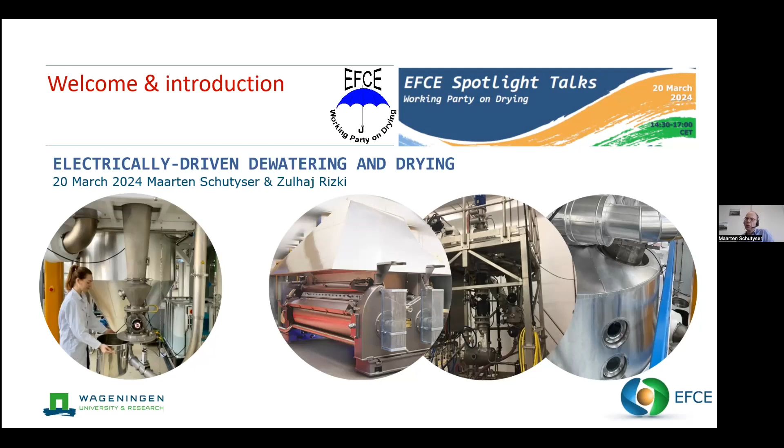Welcome once again. Maybe a little bit of background on why we are organizing this talk, this small symposium around this theme: most of the current process technologies are still based on heating, using heat. So most dewatering and drying processes are thermally driven. We really need a radical change, a reduction in the use of energy, also because drying is one of the most energy intensive unit operations, for example in the food industry, and also many other industries. It is one of the more intense energy consuming process operations.

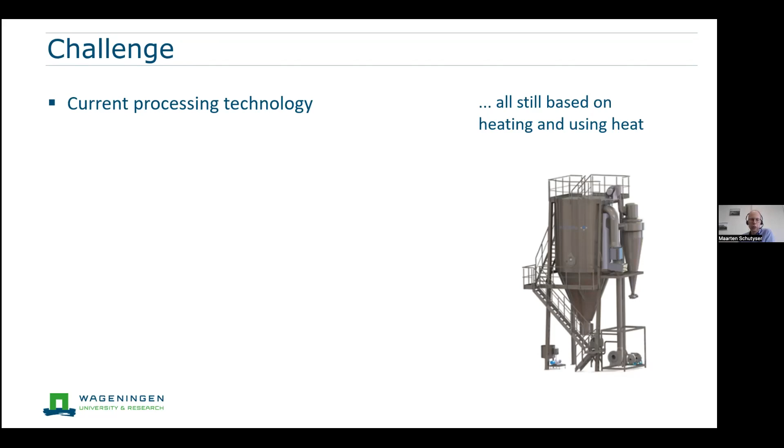We really need to use much less energy in dewatering and drying processes, but also switch to more renewable energy sources for processing. Of course, we cannot cover entire countries with solar panels to supply the energy for all these dryers, because they consume a lot of energy. So it's really important to reduce the amount of energy needed to drive these processes.

Of course, we could also say, let's just stop with drying, but that's not possible. Drying is really important to preserve foods, to make functional products. It's therefore critical not only to remove water, but also to structure your product in a certain way to give it certain characteristics. So it's quite complex, not an easy task, because otherwise people would have already done it.

But it's really important that researchers and industry keep seeking novel solutions to not only use less energy with drying, but also look at electricity-driven processes that can make use of electricity as a new renewable energy source, for example based on solar or wind energy.

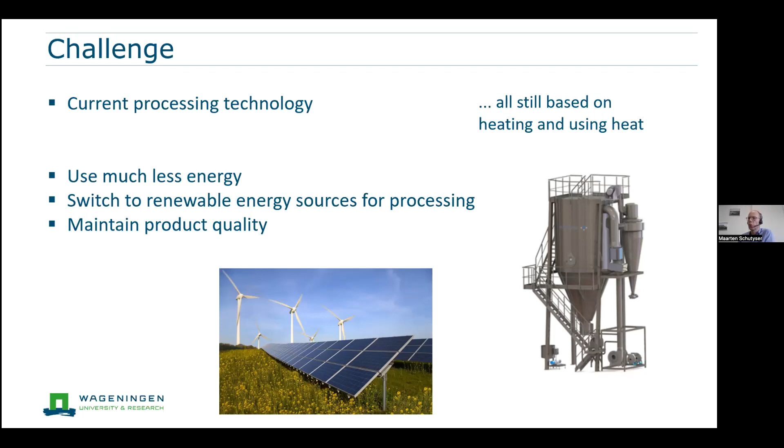So moving from fossil fuel-based water evaporation to electricity-powered liquid removal, that's the thought. Not per se to heat the air of a spray dryer with electricity rather than a gas burner, but one of the ideas is also to really use electricity as a means to push out the water from a product.

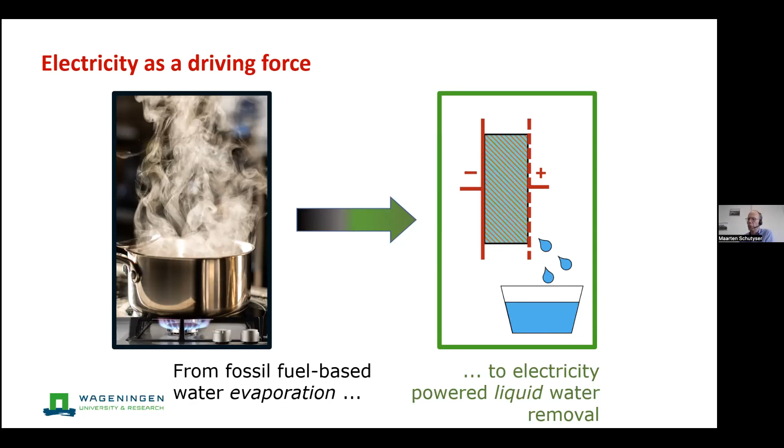And that's why we invited several speakers on different topics. Here you see an example of different dewatering and drying technologies. First, let's look at the dewatering technologies. You could distinguish dewatering technology without phase transition, like mechanical dewatering, or reverse forward osmosis, but also the example of electro-osmosis, which will be touched upon by a speaker from the Technical University of Eindhoven.

It's also possible to do dewatering with phase transition, like freeze concentration or evaporation, although these are more energy intensive. So how nice could it be if you can use electricity as a way to pull out water from sludges? In principle, electricity as a driving force is much more powerful than a temperature gradient or pressure gradient. So there's a high potential.

However, implementation of these technologies and scaling them up is another challenge, which will be touched upon by one of the speakers. Now, ultimately during drying, you want to also shape and microstructure the product, which is actually the distinction between dewatering and drying. In dewatering, you just concentrate; in drying, you actually go to a final microstructured product.

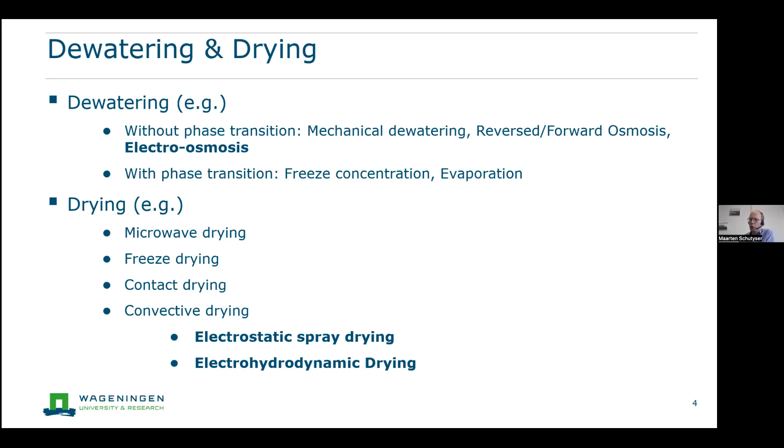So then we come to today's program. We start with the introduction from Zulhaj Rizki and myself. Then we'll start with two presentations.

The first one on electro-osmotic dewatering and the second one on electrohydrodynamic drying, from Sarthak Mehta and Judith from Technical University of Eindhoven and Wageningen University. Both are PhD students, and they work in a bigger project called Electrified, in which we study three different technologies using electricity as a driving force for dewatering. That was one of the basic ideas, to further extend that with extra speakers.

And we're very happy that Professor Alex Martynenko will give a presentation on electrohydrodynamic drying and the prospects for its practical applications, all the way from Canada. But of course, online is easier than live. I'm very happy he's willing to present his experience on these technologies. And also a presentation from Chutani on electrostatic spray drying of whey protein isolate and lactose dispersions. She is from the Irish Institute, the Teagasc Food Research Center. We're happy she is willing to give a presentation on this interesting novel spray drying technique, also enhanced by the use of electricity.

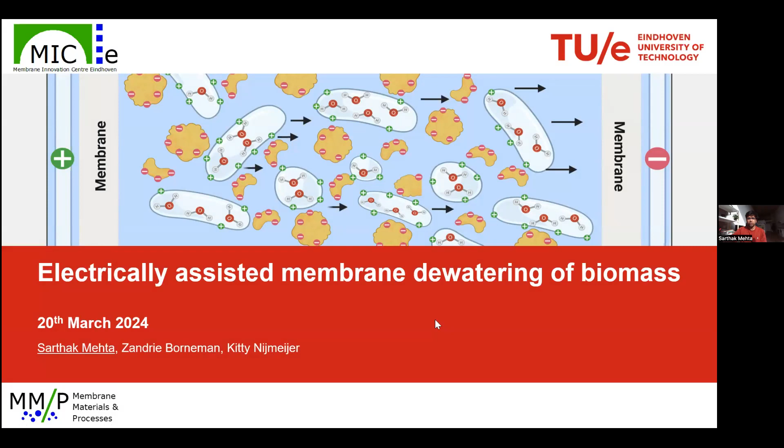I hope my screen is visible to everyone. Thanks a lot for being here. My name is Sarthak Mehta. I'm a PhD student at the Eindhoven University of Technology, and today I'll be talking about my project, which is electrically assisted membrane dewatering of biomass.

We know that the bio-based market is growing like never before. Earlier, food products were considered part of the bio-based economy, but now new products and commodities are emerging in the form of packaging, biofuel, and similar examples. The whole reason we are moving towards a bio-based economy and bio-based products is because we want to get rid of fossil fuel, we want to move away from fossil fuel.

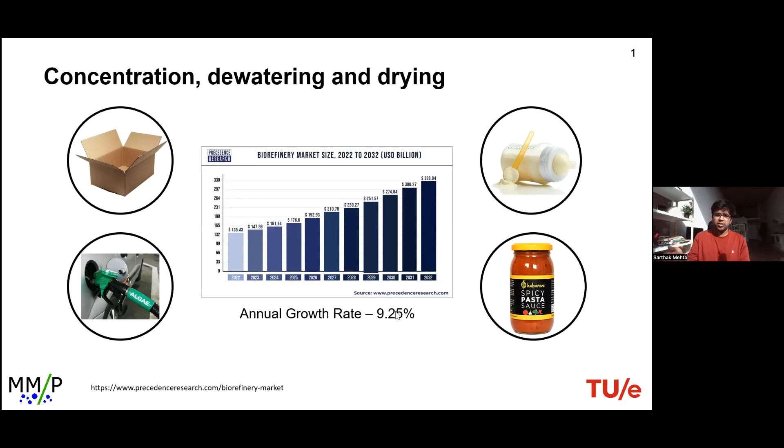In order to produce these bio-based products, one of the key challenges we come across is drying, concentration, and dewatering. The reason is that biomaterials are water-rich, and in order to store, utilize, and transport these materials, it is important to go through this unit operation. Currently this is done using thermal energy, as pointed out by Maarten, and drying technologies account for 20% of the energy consumed in industrial processes.

So it's very energy intensive. Because we use thermal energy mostly to evaporate this water, we lose a lot of energy in phase transition. Finally, because we mostly use natural gas to produce this thermal energy and dewater, it's kind of counterintuitive, because we want to move away from fossil fuels, yet we want to use fossil fuels to dewater the biomass.

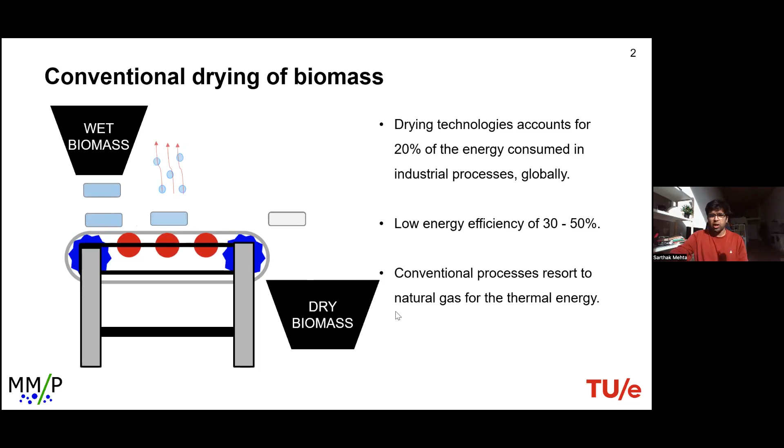Membrane dewatering offers a sustainable alternative to this problem. Most biomass dewatering using membranes is done by applying a certain pressure. So what we do is take a membrane and pass a biomass slurry, consisting of biomass and water, through this membrane. In a common notion, the biomass is retained and the water permeates, separating the two phases from one another and giving us a dewatered biomass product.

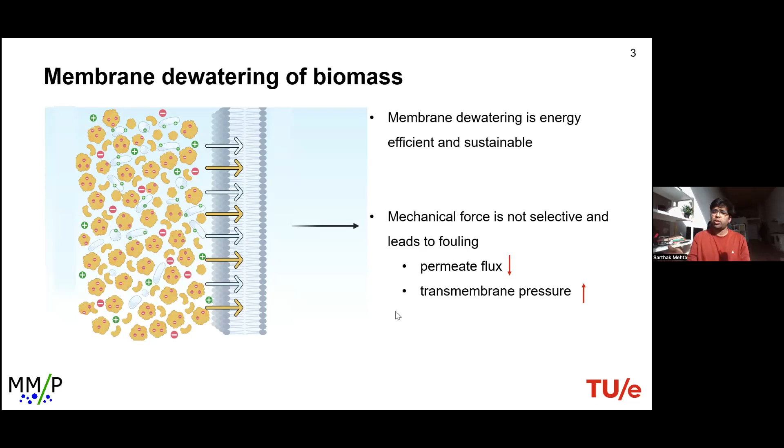But the problem with this pressure-driven process is that the pressure is non-selective. It is equally applied on the biomass as it is on the aqueous media, pushing the biomass towards the membrane, leading to clogging and fouling. This leads to inefficient dewatering because now your permeate flux reduces and the operational pressure is significantly high.

Therefore, we as KIC Electrified are a consortium working towards moving away from fossil fuel-based evaporation and towards an electrically driven dewatering system. Our consortium is divided into three work packages. Work package 1 deals with dilute slurries, work package 2 deals with semi-dilute slurries, and work package 3 deals with rather concentrated slurries. My work relies on work package 2, which is the absorbed water in the semi-dilute slurries.

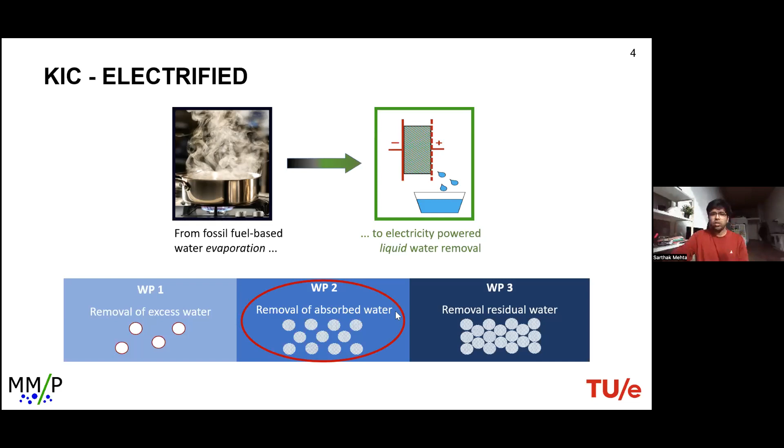The feed concentration for this work package is roughly around 20% volume by volume of solid content. That's the feed we try to work with, and we try to dewater as much as possible. But before we move into my project specifically, I would like to step back and explain how electric field-driven selective migration actually works. What we do is exploit the difference in polarities between the biomass and the aqueous media. Biomass in presence of water is always charged.

Because of these charges, it is easy to manipulate and move them across the electric field lines when an electric field is superimposed. When the biomass or these particles can move through the electric field, it is possible when the particles are too small, and this is referred to as electrophoresis. But what happens if the particles are too big? When the particles are too big, they agglomerate and are not movable as they were earlier.

They are immobile and stationary. But now what happens is the surrounding aqueous media starts to move in this electric field. How that happens is better explained in the further slides.

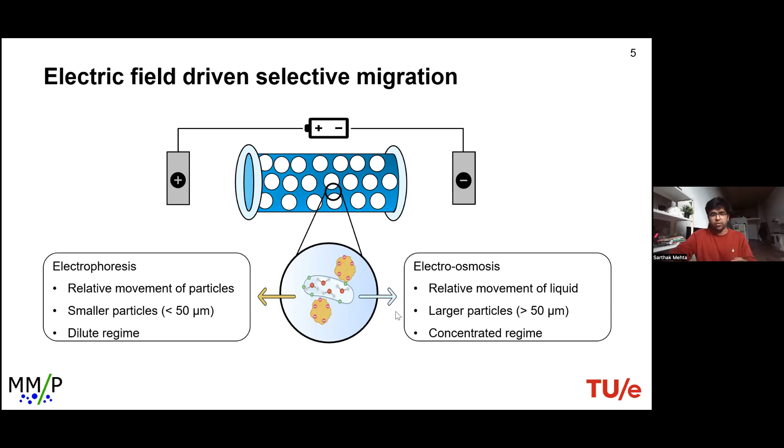So for surface charge formation, we want to understand how these surface charges are formed in the first place. How does biomass actually acquire this charge, and how can we exploit these charge formations for electro-osmotic dewatering?

Imagine you have a biomass surface with hydroxyl surface groups, and that these groups are exposed to a basic media. What we observe is that because of hydroxide ions present in the basic aqueous media, the hydroxyl group on the surface of biomass deprotonates, developing a net negative charge on the biomass surface.

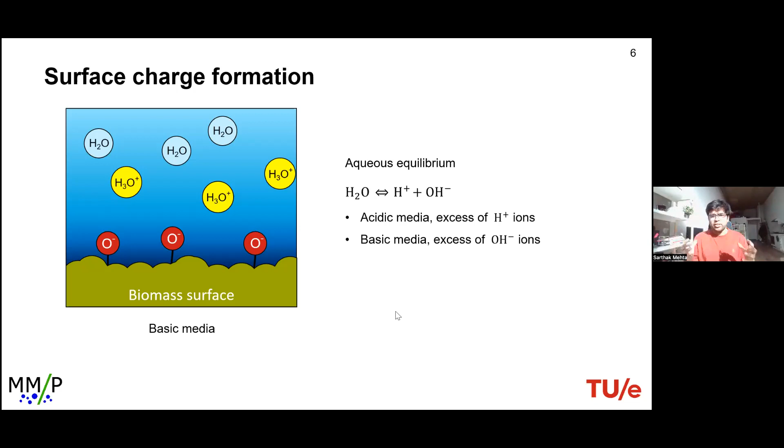Because there's a net negative charge on the biomass surface, the surrounding aqueous media polarizes itself and creates an oppositely positive charge. When we zoom out, this is the figure we see: a negatively charged biomass layer surrounded by an aqueous region of positive charge.

Because of the negatively charged biomass surface, we first form an electric double layer. This is an instantaneous process in which there is a negatively charged surface surrounded by a thin layer of positively charged aqueous media, and this comprises the electric double layer.

We can also measure the electric potential of the biomass at the edge of the electric double layer, and this is referred to as zeta potential. This potential is measured at the dotted line of the figure, as you can see.

But because of the charged surface of the biomass, the potential is exerted beyond the electric double layer, and there is a localized diffusive region created just above the electric double layer. This diffusive region consists of positive charges to compensate for the negative charge of the biomass region.

Another thing to note is that the electric potential decays as we go along the y-axis. This decay is exponential, and because of this exponential decay, the concentration of ions also decays along the y-axis. This decay is characterized by the Debye length, which refers to the length at which the zeta potential reduces by 1 over exponential.

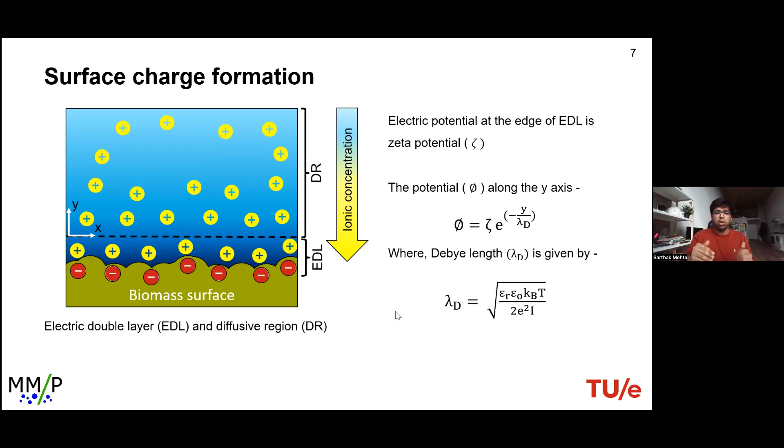Now that we understand how these charges are formed in the diffusive region, what we do in a streaming potential experiment is apply pressure. In applying pressure, we are able to strip off ions from the top region.

Let's assume we apply X bar of pressure in the diffusive region, and we are able to strip off the top layer of ions. As we increase the pressure, we are able to strip off ions closer to the biomass surface.

This is because as we increase the pressure, we are able to push ions that are more tightly bound to the biomass surface, as they are closer and the potential is higher. When we increase the pressure even further, we can strip off ions as close as the electric double layer, and this is referred to as streaming potential.

We apply a certain pressure and we see a potential being generated as the ions are stripped off from the diffusive region of the biomass slurry.

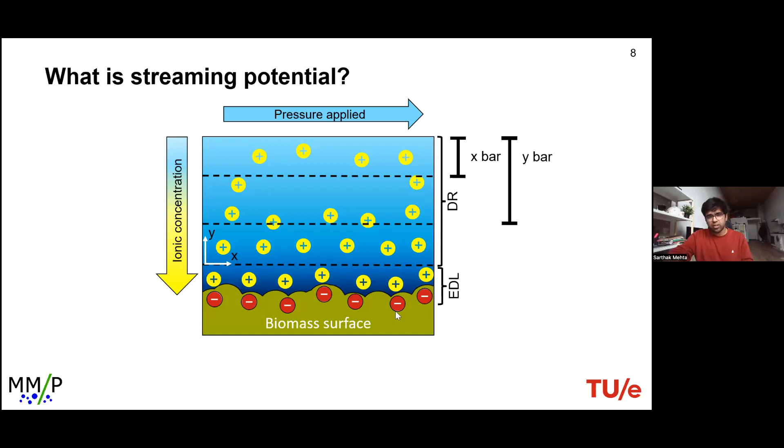So what we do is we use non-porous silica particles of 0.1 mm diameter and put them in a cylinder of 30 mm length. We close the cylinder with mesh electrodes: on one side we have the reference electrode, on the other side we have a sensing electrode.

Now, as we pass an aqueous media through this packed bed of silica particles, a potential is generated across the bed. This potential is because of the ions that have been stripped off from the diffusive region, creating a net potential that is measured using the open circuit voltage and a voltmeter.

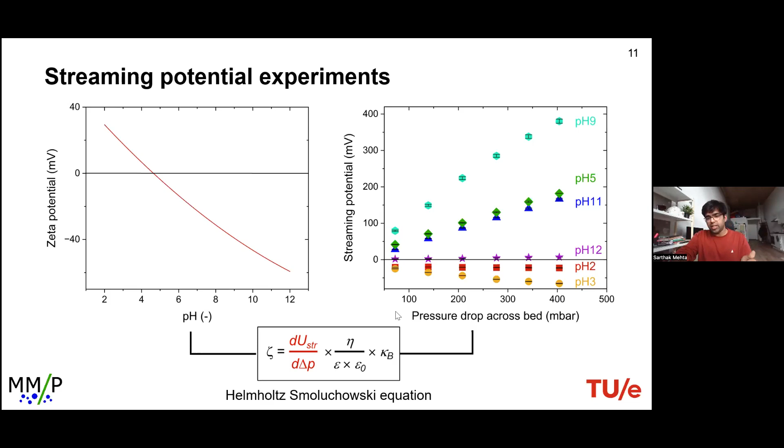Before we move into electroosmosis, I would like to explain how the diffusive region is actually manipulated under an electric field. When we apply an electric field, we start to strip off these ions from the diffusive region and move them along the electric field line, or away from it, based on their charges. Considering we have positive charge in the diffusive region for now, we'll assume they move along the electric field line in the positive x-axis direction.

As we start stripping off these ions in an electric field, we see that there is a shear plane, meaning the tightly bound ions, while moving with the electric field line, cannot necessarily break the attractive force between the biomass surface and the ion present in the diffusive region. But as you go along the y-axis, the net potential experienced by the ions reduces because of exponential decay. At some point, referred to as the slip plane, the electric field force is sufficient to overcome this attractive force, leading to slipping of these ions and an electro-osmotic flow.

To give a better example, imagine you are standing on a skateboard. The skateboard here represents the slip plane. As I pull the skateboard, the person sitting on top is also dragged with it. Similarly, as the slip plane is pulled, the water molecules sitting on top of this slip plane are also dragged with it. In this process, we are able to move not just the water at the slip plane, but the bulk media, using convection.

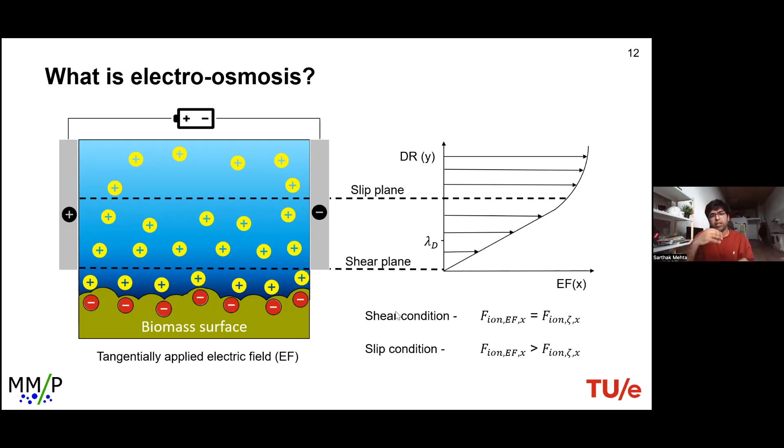Now, we understand that because of the pores formed by silica particles coming together, it is actually the center diffusive region that contributes to the electroosmotic flow. We again use non-porous silica particles of 0.1 mm diameter, and we vary pH and ionic strength.

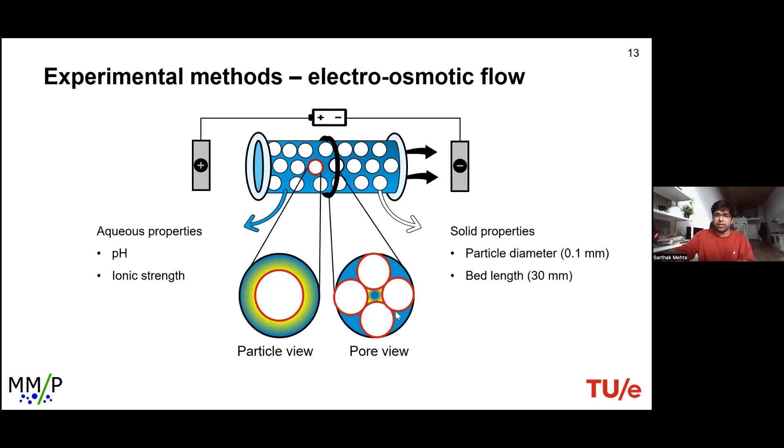Instead of measuring voltage as we pass fluid through this bed, we rather apply voltage to the bed and see whether we can move water to the other side. We have made some modifications to the initial setup, as you can see here. On the right, you can see the setup modified with two measuring cylinders on each side, to measure the amount of water volume displaced when an electric field was applied.

If you closely notice, there's a red dotted line referencing the initial point, and after time t, we see that the water level has risen, suggesting that after applying a certain electric field, water is stripped out of this diffusive region and moves towards one of the columns, based on the electric charge of the electrode.

We have a graph here showing the time dependence of electroosmosis under different pH conditions. For pH 12, the flow is in the right-hand side, or positive direction, whereas for pH 2, the flow is in the negative direction. This is because the silica particle polarity changes between these two pHs, and because of this change, the flow is in different directions. The aqueous diffusive region has different charges, so one moves towards the positive electrode and the other towards the negative electrode, giving a difference in flow direction.

The second thing I want to point out is the voltage. As we increase the voltage, we are able to push the water further. That's simply because with every increasing voltage, the force experienced by the ion is now higher, and it can overcome the attractive force to the biomass surface, thereby allowing for electroosmosis.

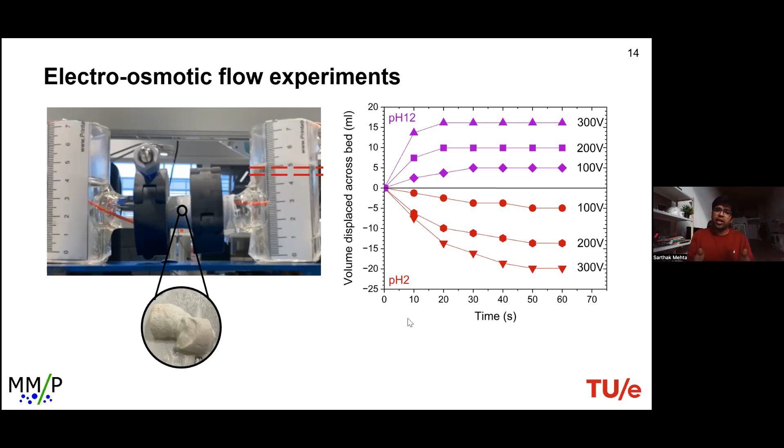An important thing to note here is that pH 2 and 3 experience an opposite direction of flow because they have a positive zeta potential, while pH 11 and 12 lie on the other side of the flow because they have a negative zeta potential.

We don't see any electroosmotic dewatering for pH 5 and 9 for two reasons. First, while the zeta potential does exist, it is the ionic strength that also contributes to this flow. If the ionic strength of pH 5 and pH 9 is on the order of 10 to the power minus 5 molar, there are not enough ions present in the diffusive region to push the water to the other side of the column.

The second thing I'd like to point out is that while the zeta potential of pH 12 is higher than that of pH 2, we see that electroosmotic dewatering is better for pH 2. That is because, in the case of pH 2, the surface is positively charged, meaning the surrounding diffusive region has more hydroxide ions present rather than protons. Because these hydroxide ions have higher hydration numbers than protons, pH 2 shows higher dewatering, since as a hydroxide ion is pushed to the other side, so is its hydration shell, and more water is pushed to one of the columns.

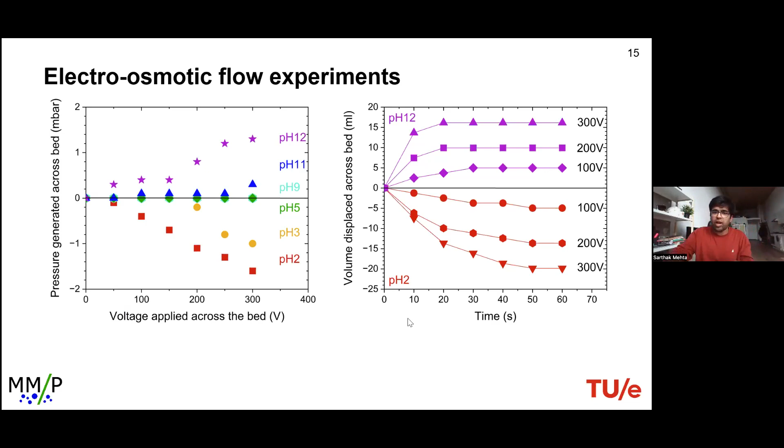This also explains: if it's easier to dewater systems with higher ionic strength, does salty water dewater faster? Yes. While I cannot show the results in this presentation, we have concluded so far that as we increase the salt concentration, we reduce the Debye layer and can therefore strip ions faster.

This reversal in polarity can be explained by the shielding effect of the ions. Because of a negatively charged surface, the ions are shielded, and as they shield the negative charge, at a certain concentration the diffusive region no longer experiences any potential from the biomass, but rather the potential of the shield itself. So instead of experiencing negative charge as it would earlier, it now experiences a net positive charge, and the streaming potential changes. So the reversal of polarity is due to a shielding effect, and the diffusive region now experiences the ions instead of the biomass surface.

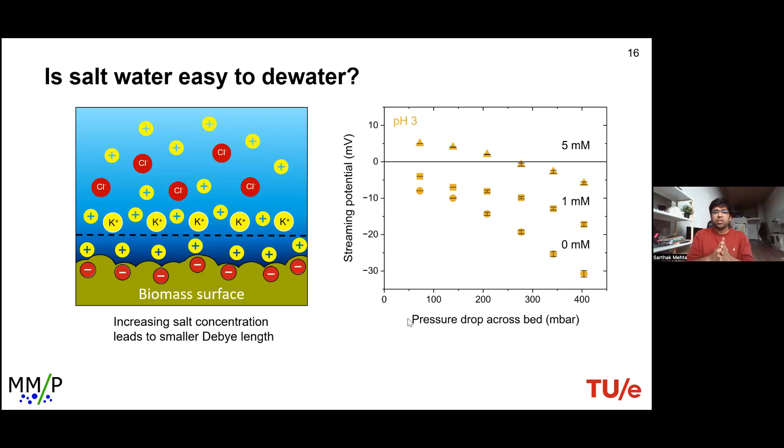To summarize, the electric field responsible for electroosmosis is essential, but so are zeta potential and ionic strength. While zeta potential is important for creating the diffusive region, it's actually the ionic strength that leads to electroosmosis, or water migration under the electric field. As we increase the salt concentration, we reduce the Debye length, increase ionic strength, and see better electroosmotic dewatering, which I cannot yet show in these experiments.

Thanks a lot for your kind attention.

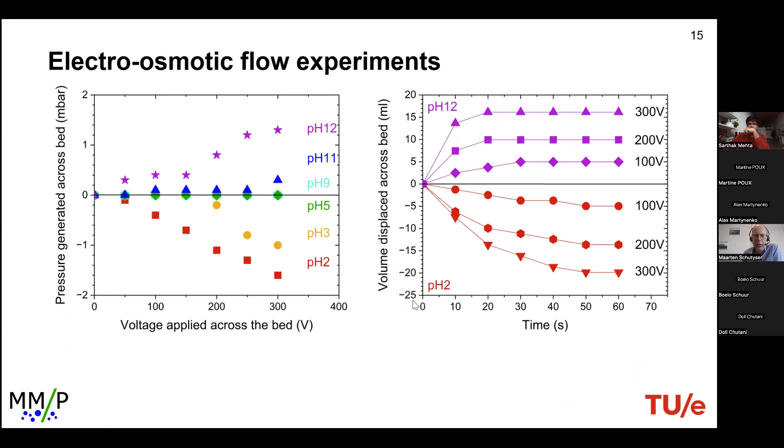On the electro-osmotic setup or flow setup, you chose to build up a pressure. Could you simply translate that to a setup where you actually go towards dewatering, or might you run into different types of issues? Why did you choose this particular setup?

The reason we started with this particular setup is because when working towards dewatering, we wanted to make sure the bed is always saturated. When dewatering starts, there will be a time when there is lesser water in the pore, and that will make the pore collapse. That will eventually lead to higher electroosmotic dewatering because the diffusive region inside the pore is now experiencing higher potential from the biomass surface. We didn't want that to happen because that's an additional complication we don't want in our experiments early on.

So we created these columns to basically act as reservoirs, so that when water is moved through the bed and the bed does not dry, water from one reservoir can simply enter the bed as the other one rises. It is when we were doing these experiments that we realized perhaps the electroosmotic flow is not constant, because as you can see from the graph, it stabilizes over time.

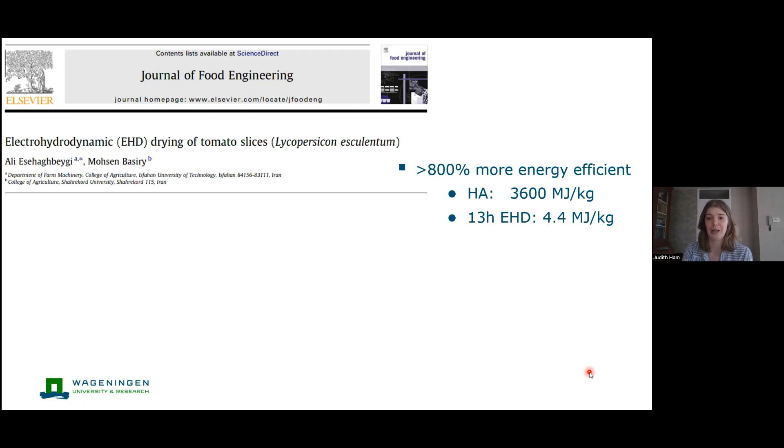I'm researching equipment design of a new drying technique, namely electrohydrodynamic drying. For this, like any starting researcher, I looked into literature. I found in this first paper that EHD drying is more than 8 times as efficient as hot air drying, and this is huge, right? But then a second paper said that EHD drying is only 25% more energy efficient, so that's already not that much anymore. Now you can say, okay, maybe the setup in the first paper is way better. But maybe the setup in the second paper, where it actually only takes 4 hours of drying, is better than the first paper, because fast drying is quite relevant for industry.

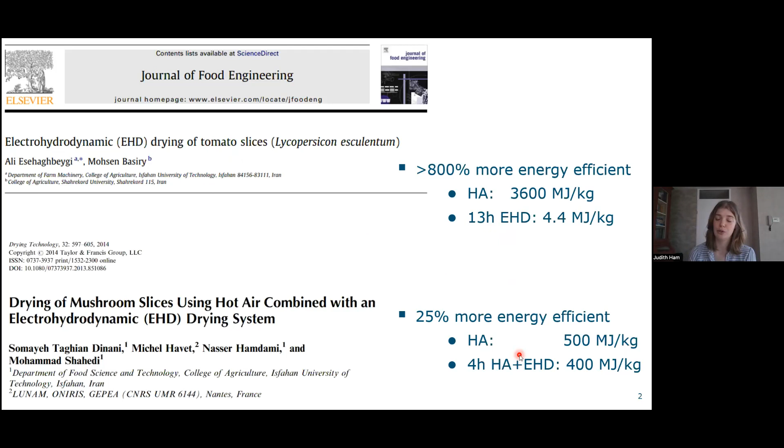Now, my question would be, what is the difference between these setups? I already see in the title of these papers that one dries tomatoes and one dries mushrooms, but I can also tell you that one only uses EHD drying, while the other combines EHD with hot air drying. So maybe the first one is better because it's very energy efficient, but maybe the second one is better because it dries very fast. Today I want to tell you about design choices we can make in dryer design to choose the best drying setups—specifically about electrohydrodynamic drying, and especially the experimental characterization of an EHD drying setup. My name is Judith Ham, and I'm from Wageningen University. I hope to give you more information today about these design choices.

Electrohydrodynamic drying is a new drying technique where we use a small electrode surface, either a pin or a wire, and on this small electrode surface we apply a very high voltage in the range of kilovolts. If we apply this high voltage, the air around the small electrode surface will ionize because of electrical discharge. If we then supply a collector electrode that's either grounded or of opposite charge, the ionized air will start to flow. This creates an ionic wind, because the ionized air molecules drag along non-ionized air molecules. If we then supply a material, we enhance convective transfer of moisture from the material to the bulk air, and this way enhance drying.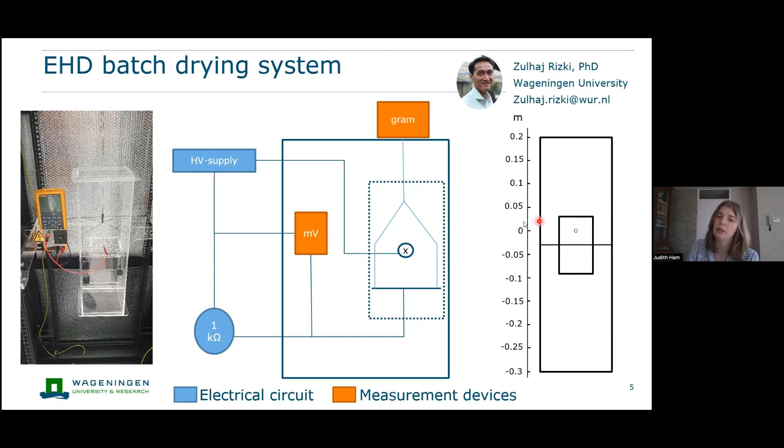Experiments that I can do with my own setup are that we can vary the electrical potential that we apply, but we can also vary the setup parameters. We can vary the emitter electrode. We can change the material it is, but we can also place it farther away or closer by the collector electrode. We can also place it to the side, so we can change the position relative to the collector electrode, or we can use multiple electrodes.

Further, we can vary the type of collector electrode that we can use. For example, we can use meshes, but we can also use plates of different sizes. And lastly, we can also, of course, change the product that we are drying. But as I'm focusing at the moment on design parameters, that one I leave out for now.

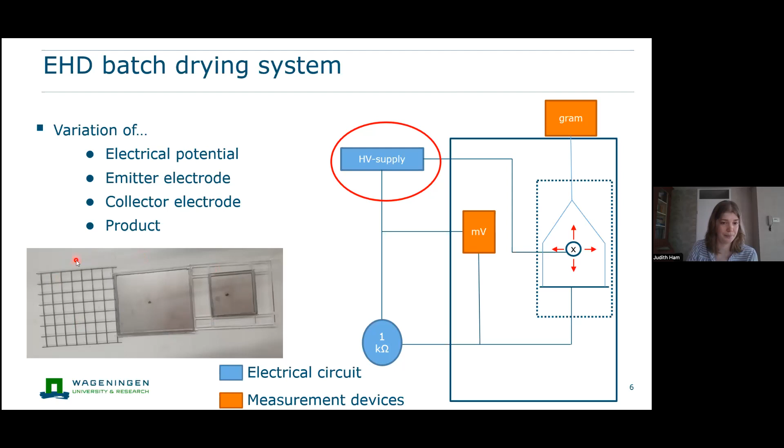So let's first focus on this collector electrodes principle. Now, based on modeling, we already see quite a difference in the system if we use either a mesh or a plate electrode.

As I explained before, the EHD mechanism is based on creation of a wind. And if we use a mesh electrode, this wind can form a wind jet. The EHD jet can pass through the mesh, and this way it generates quite high wind velocities, but they keep located at the center. Meanwhile, if we use a plate, not as high wind velocities are used, and the wind jet is actually distributed more over the area of the full plate. So it's more divided.

You also see that after the wind is bended upwards over the plate, it will move upwards. Even though the plate here is only part of the channel width, very little wind will bend downwards to the bottom side. Most of the wind will move upwards due to pressure differences.

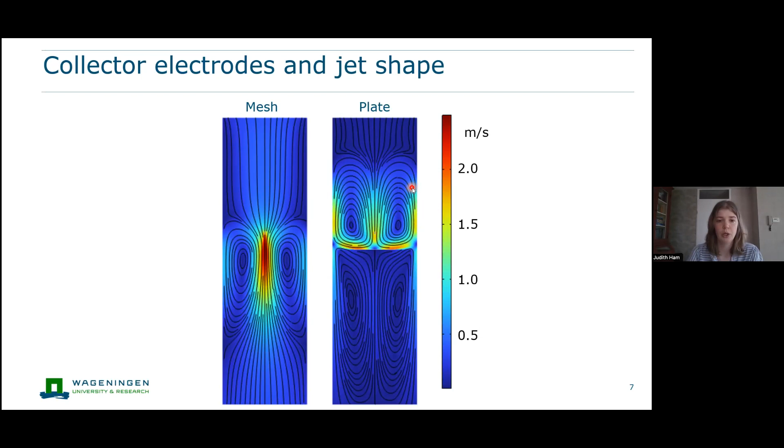And they're actually quite similar to what we expect based on modeling. So these lines in the middle are caused by the impact of the impinging jet, while the lines on the sides are actually due to the wind bending upwards from the middle and creating kind of an airflow path.

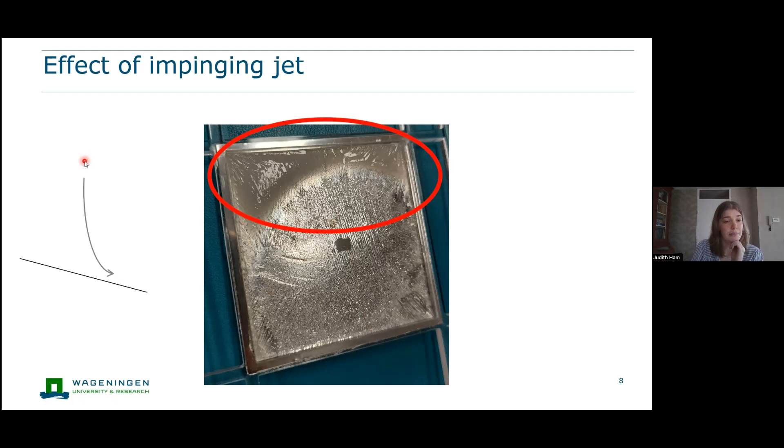Something else that you can notice is this very bulky gel-like structure on top. This is due to an experiment where we didn't place the plate completely leveled, but we had it a bit tilted. The idea was that in that way, we kind of can guide the wind downwards to the path of the least resistance. So you can see that here, that if you have an impinging jet that goes down, we expect the wind to bend upwards to the downside because it experiences least resistance.

But what you also can expect is that due to gravity, most of the sample will also be at the bottom side of the plate. Now what you then see is the upper side of the plate, even though it had less sample, it also dried less because it experienced less wind. Meanwhile, the part with most sample, the bottom side, was drier because it experienced more wind. So based on this, we can say that a good dryer should generate sufficient wind flow, and that drying is therefore dependent on the wind flow.

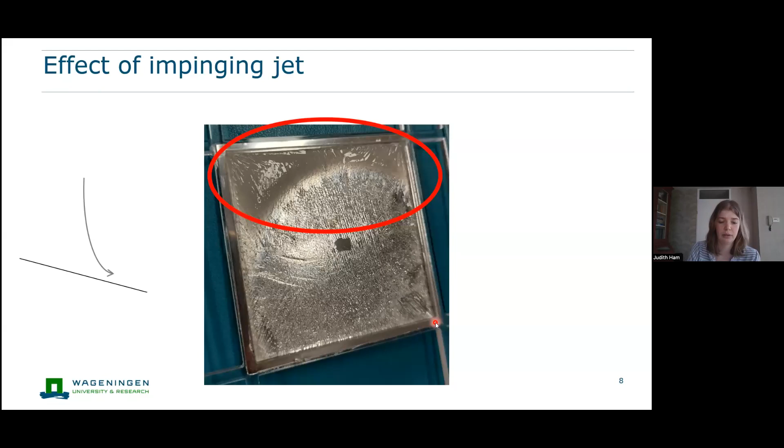So if we have 4 centimeters between the electrodes, we achieve lower currents than if we have 1 centimeter between electrodes. For this, we have an equation which states that current is dependent on a geometrical constant, the electric permittivity between the electrodes,

ion mobility of the air, and an onset voltage. The onset voltage is the minimal amount of electrical potential that is needed for current to start flowing. Below this onset voltage, the amount of energy you're supplying is not sufficient to bridge over this air gap in between the electrodes.

If the distance between the electrodes is higher, the onset voltage will also be higher. Meanwhile, the geometrical constant will get lower. We prefer to have an onset voltage that's as little as possible because that's how we can generate high currents and therefore high wind velocity.

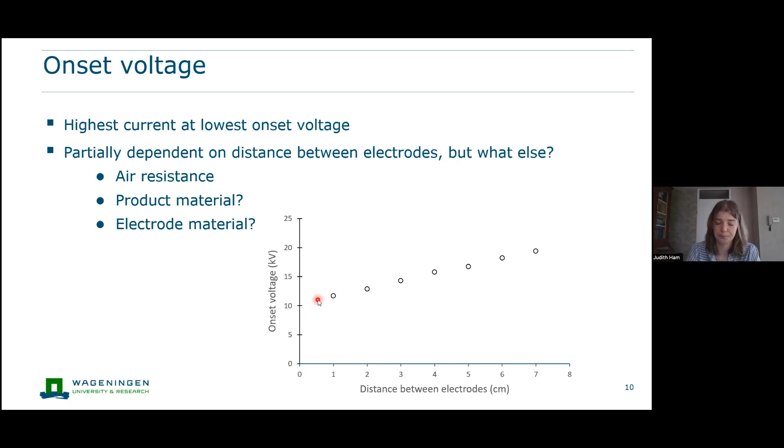Now, as I said, all of this is in order to generate the highest amount of wind velocity that we can generate. So what we did is try to see if we can measure the wind velocity.

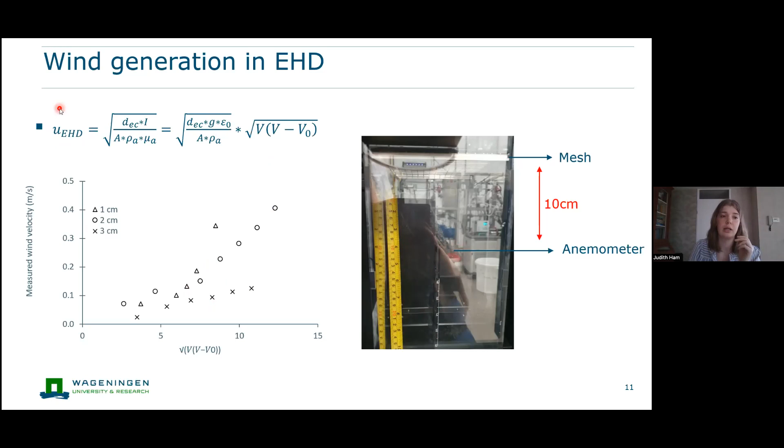Now, as I said already, we placed our anemometer in parallel to our wind jet. Meanwhile, the anemometer measures wind coming through its tip, so we don't measure very accurately. So we want to compare the data that we measure here to what we would calculate as the average wind velocity on the mesh.

So we measure quite accurately, but the wind velocity that we measure is a bit underestimated compared to what we would actually expect. And this has three reasons. First of all, like I said, we measure with the anemometer parallel to the jet, meanwhile we would measure more if we placed it perpendicular. Secondly, we don't measure exactly on the mesh - we measure 10 centimeters below, and we have to do that to not disturb the electrical field.

And thirdly, we measure only on a very small distance, just below, directly below the mesh, and directly below the emitter. Meanwhile, the air jet might be wider than the region that we measure.

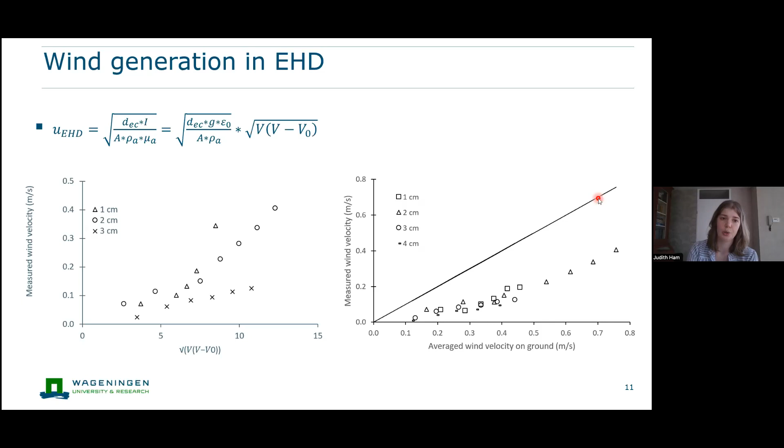So the measured data that we tested is actually not taking into account this wind flow on the side, and therefore we mostly use the equation that I just showed you for the average wind velocity on the mesh.

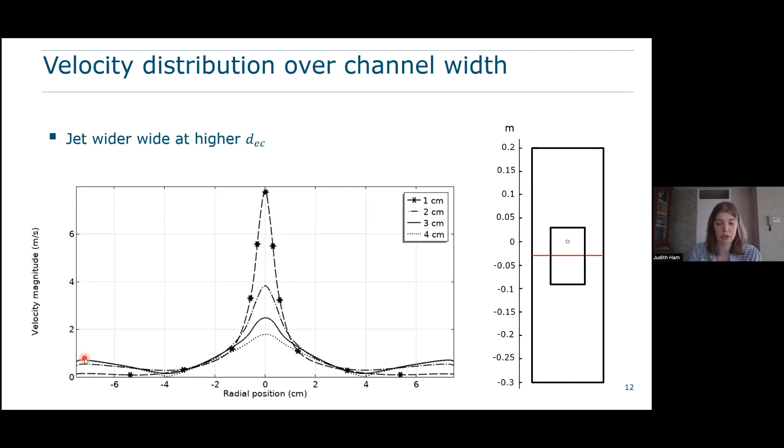So in order to dry fast, we need high electrical field strength, either at high electrical potentials or at low distance between electrodes. But we don't only dry fast then, we also dry very energy efficiently then, which is beneficial, which allows us to make both the best drying setup - either the fastest drying, or the most energy efficient drying.

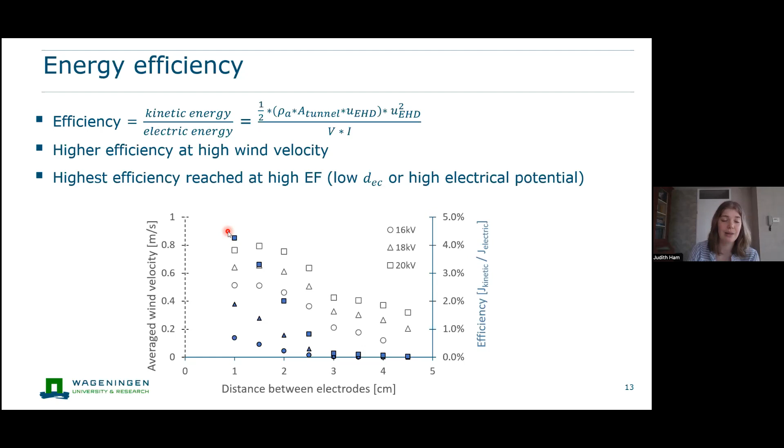So I hope next time someone asks you what is better drying, I hope you think to yourself: okay, we have different ways to conclude how something dries fast, but in EHD drying it actually doesn't matter, as fast drying is also energy efficient drying. And I hope that this convinced you of that.

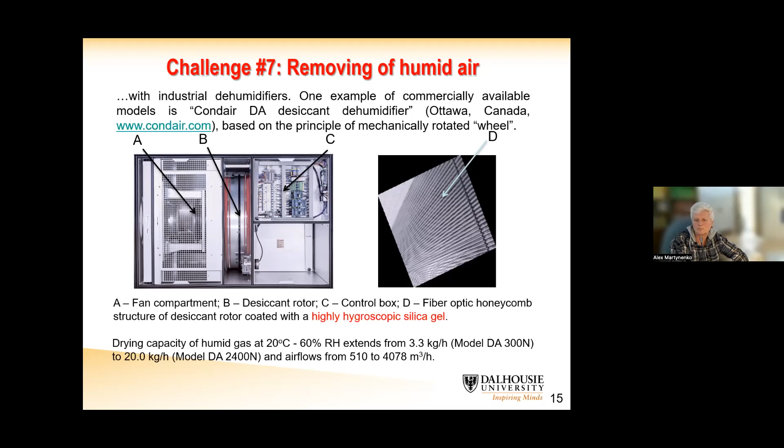So what issues should be solved in future research? First of all, we don't have a mathematical model of the full EHD effect. This means that in the EHD effect, we have coupling of mass, energy, momentum, and charge transfers. For this particular case, nobody really developed a reasonably good model.

And that's what we are doing right now. We are working on combining all of these effects into one coupled type of model. Also, the role of spatial charge and electrostatic induction and mass transfer is not clear. The effect of material properties such as thickness, microstructure, and electric conductivity on mass transfer is not clear.

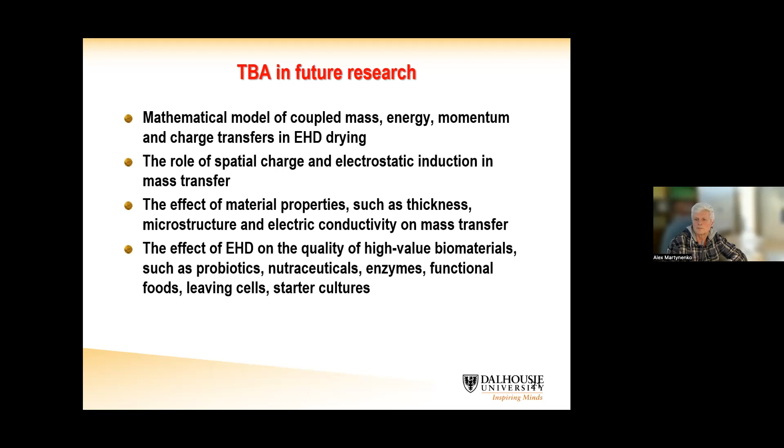So unfortunately, we are limited right now only to thin layer drying, because what we know is that EHD has only a convective mechanism of drying, and nobody has really explored the electrodiffusion part of the EHD effect. And definitely the effect of EHD on the quality of high value biomaterials is still under exploration. I see that recent papers, mostly published by Chinese researchers, are mostly concentrated on probiotics, nutraceuticals, enzymes, and functional foods. So it's a great opportunity for future sustainable drying.

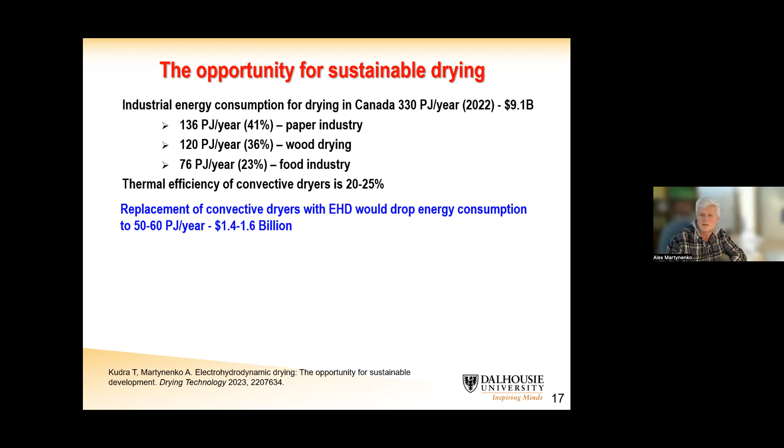I just gave the example of Canada, where we used almost 330 petajoules per year of energy for drying. And here is just the sectoral use. It costs industry $9.1 billion. Simple replacement of convective dryers with EHD would drop energy consumption significantly, like 6 times.

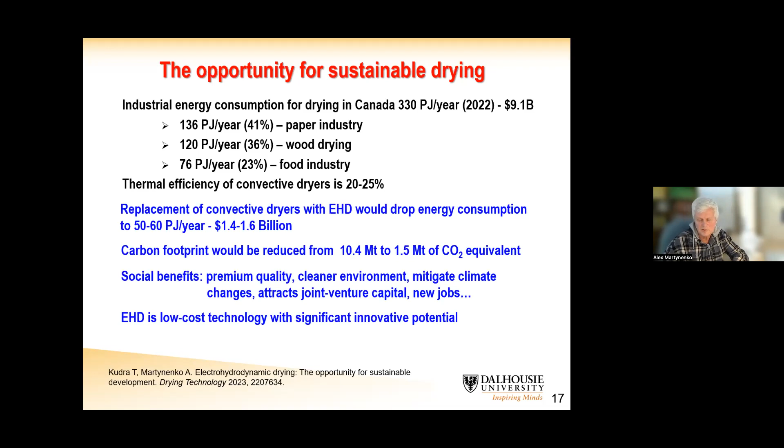Definitely carbon footprint would be reduced. Social benefits: premium quality product, cleaner environment, climate change mitigation, and most importantly, EHD is a low-cost technology with significant innovative potential. Thank you for your attention, and I would be happy to answer your questions.

Thank you very much for your interesting presentation, Alex. I think it really nicely complements the presentation of Judith, who was a little bit more into the details of a specific setup, and you broadened it to give a bit of an overview on scale up and application. So it's really nice to see that you started building and implementing your knowledge into commercial equipment to actually make the impact. But I could guess that there are some questions.

Yeah, I see here a first question from Ian Kemp. If energy use is less than the latent heat, logically either some water is being removed in liquid form or the heat of evaporation is being supplied by another source, for example, evaporative cooling of the airflow. Thank you, which one is it? That's a good question. So some water probably is removed in liquid form, so it's just the electric field pulling water molecules in liquid form.

But also we could consider that part of the heat is coming from the outside surrounding air, which facilitates evaporation of the water from the surface. So both.

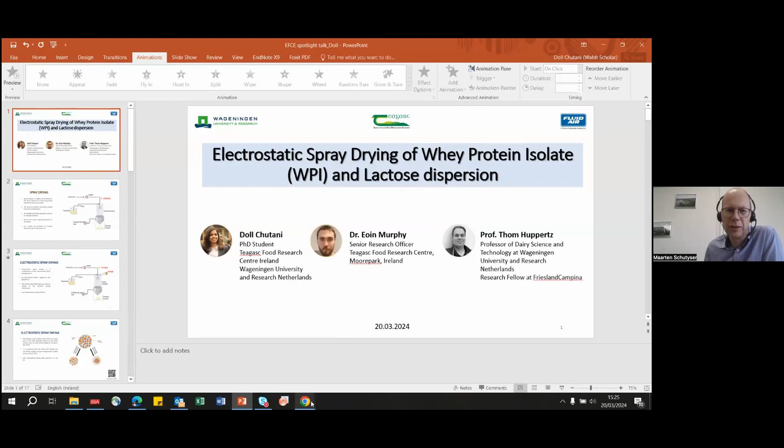There were really interesting talks from Alex, Sarthak, and Judith about electrically driven dewatering technologies. But I could see those technologies work on solid or semi-solid products. So let's see how an electrically driven dewatering technology works on liquid products.

Hello again, my name is Chutani. I'm a PhD student based at Teagasc Food Research Center, Ireland, and also affiliated with Wageningen University and Research, Netherlands. Dr. Eoin Murphy from Teagasc and Professor Thom Huppertz from Wageningen University and FrieslandCampina are my supervisors. Today I'm going to present on a new technology, electrostatic spray drying, its working principle, and its role in the drying of whey protein isolate and lactose dispersion.

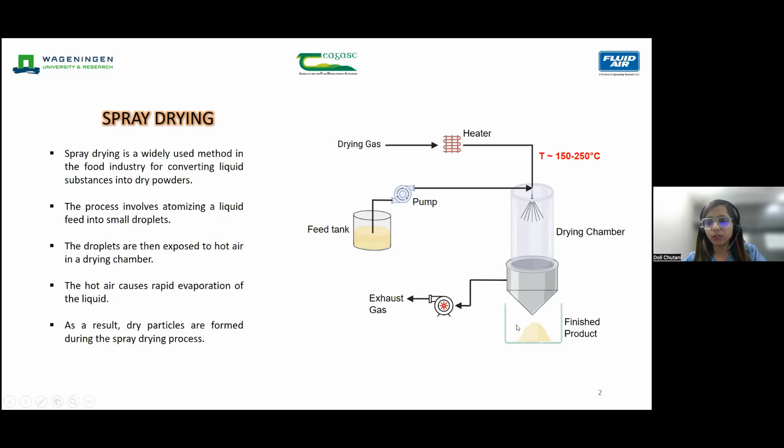So first, let's start with a brief overview of spray drying. We all know spray drying is a widely used method in the food industry for converting liquid products into dry powders. Broadly, this process involves the feed being pumped through a nozzle which atomizes the liquid into small droplets. These droplets are then exposed to very hot air, temperatures around 150 to 250 degrees Celsius, in a drying chamber, where rapid evaporation of water takes place, resulting in the formation of dry particles.

Electrostatic spray drying is a slight modification of the conventional spray drying process. Here, an electrostatic field is applied to the liquid feed. This electrostatic field imparts an electric charge to the droplets forming during atomization, which makes it possible to dry these atomized droplets at low temperatures, starting from 75 degrees and going up to 150 degrees, resulting in dry powders. Now, you may wonder how an electric charge enables such low temperature drying.

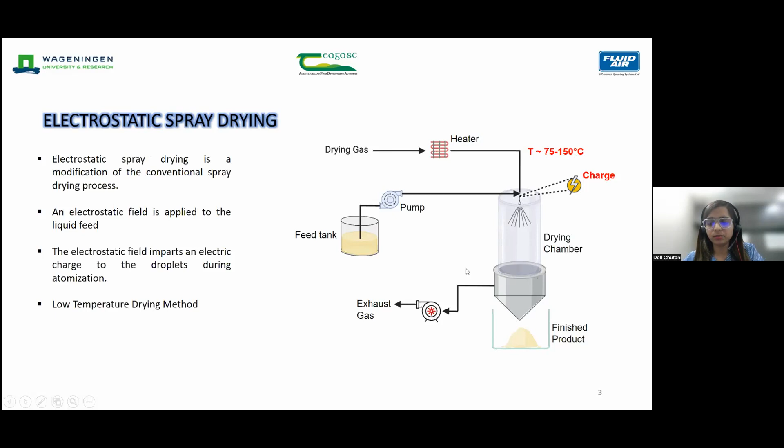So let's find out. The components in the droplets are charged, and they undergo stratification. By stratification, I mean when you charge a droplet, it drives the most polar part of the feed, which is typically water, to the outer surface, while the non-polar part tends to remain at the center.

This stratification in the components boosts the drying rate and allows drying at lower temperatures, even outlet temperatures as low as 30 degrees. Another advantage of electrostatic spray drying is that it operates in an inert atmosphere, with less than 1% oxygen, which can provide oxidative stability to the powders.

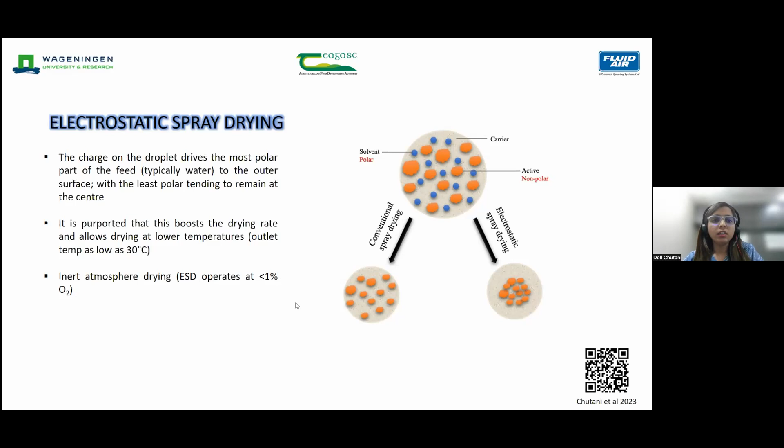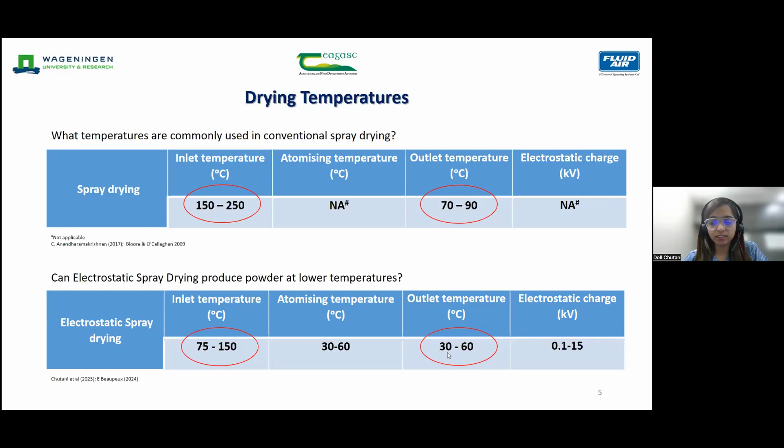If we compare drying temperatures in both techniques, conventional spray drying has inlet temperatures ranging from 150 to 250 degrees Celsius, giving outlet temperatures of 70 to 90 degrees. In electrostatic spray drying, the lowest inlet temperature could go down to 75 degrees, with outlet temperatures as low as 30 degrees. So this technique holds great potential for drying heat sensitive or volatile components.

Today I'm presenting a study on the drying of whey protein isolate and lactose dispersions, comparing the effects of electrostatic spray drying and conventional spray drying. We chose a dispersion of whey proteins and lactose. Since whey proteins are heat sensitive, we'll find out how electrostatic spray drying achieves the target of preserving their native state.

First, a dispersion was made of both ingredients in ratios similar to what is normally found in infant formula. The methodology was: a dispersion was made in the ratio 1.3 to 7.2, and then its pH was adjusted to two levels, 3.5 and 7. These two pH levels were selected so the whey proteins would have equal and opposite charges at these levels.

After that, its conductivity was adjusted at 25 degrees Celsius to two levels, 3 and 4 millisiemens per centimeter, using salt. Finally, drying was performed in an electrostatic spray dryer at 90 degrees Celsius and 10 kilovolt charge, and in a Buchi mini spray dryer at 170 degrees Celsius. Both models were at laboratory scale, and these are the processing parameters for both drying methods.

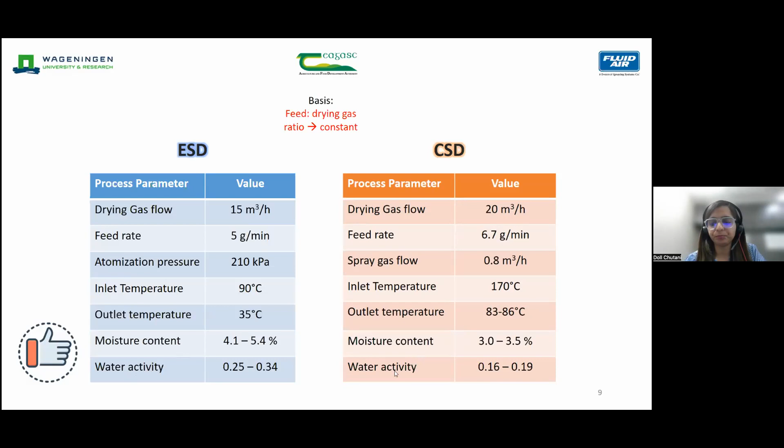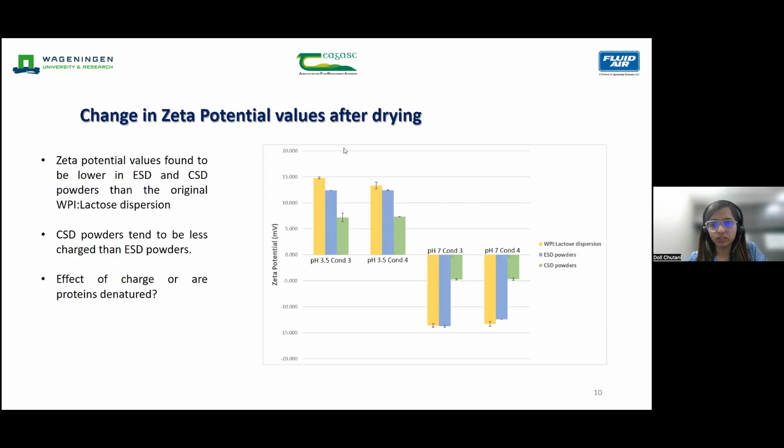Now the question is: is it because we are applying an external charge in electrostatic spray drying, or because the proteins are getting denatured during the high temperatures encountered in conventional spray drying? So let's find out. To confirm this, we looked into the denaturation profiles of whey proteins using DSC.

So we can say that the proteins were already denatured during the drying process, and the troughs didn't come up. We can say that the ESD powders indicate the presence of native proteins after drying, which may also help them retain their zeta potential.

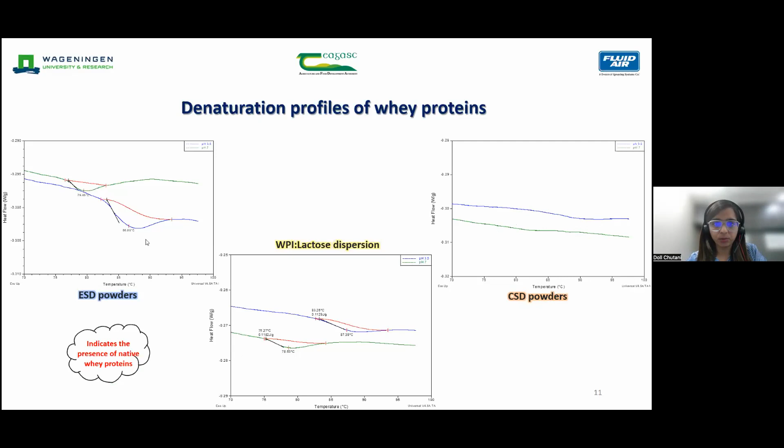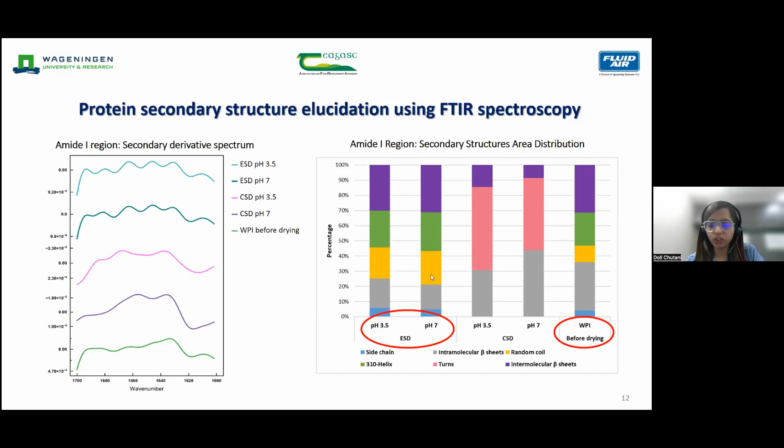This phenomenon was further validated by the cosine similarity index, a metric to measure similarity between two spectra. When compared with native whey proteins, ESD powders at pH 7 showed the highest similarity, whereas CSD powders at pH 3.5 showed the lowest similarity.

So you can say that electrostatic spray drying holds great potential in retaining the native structures of whey proteins during drying. Further, we also looked into the surface composition of the powders.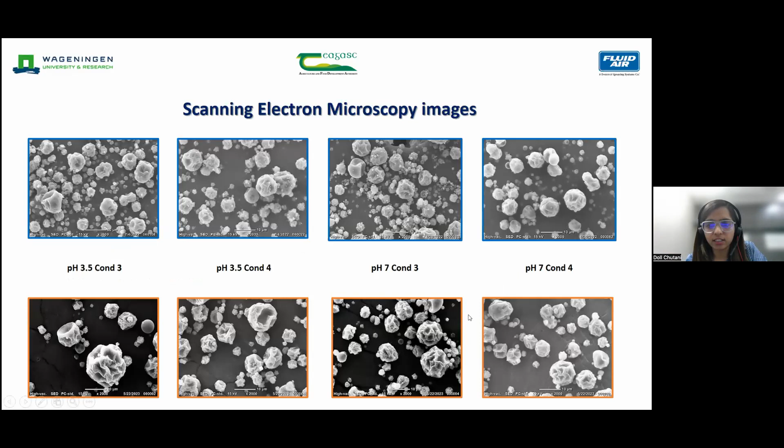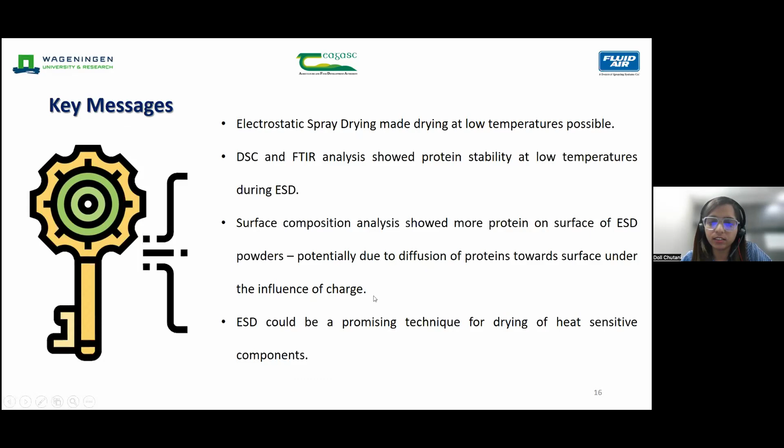The surface composition analysis showed more protein on the surface, which may be due to the diffusion of proteins towards the surface. From these results we could say that it is a promising technique for drying heat sensitive components.